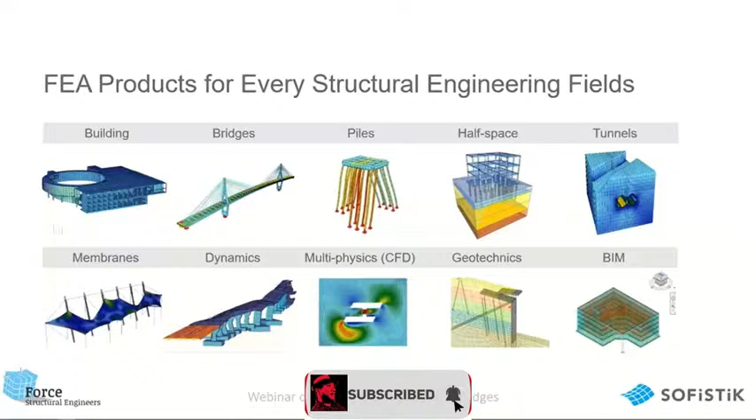You can use SOFiSTiK to analyze and design any type of bridge, from simple bridges such as slab bridges or beam slab bridges to advanced bridges such as cable stayed and suspension bridges. Today's focus is theory of cable stayed bridges. So I would now like to hand it over to Deepak to take it from here.

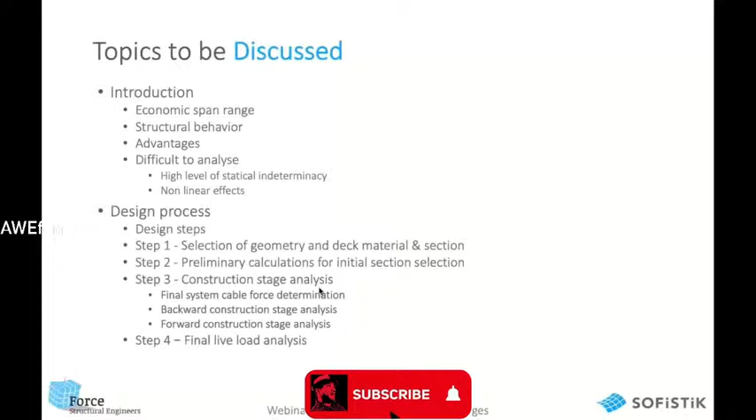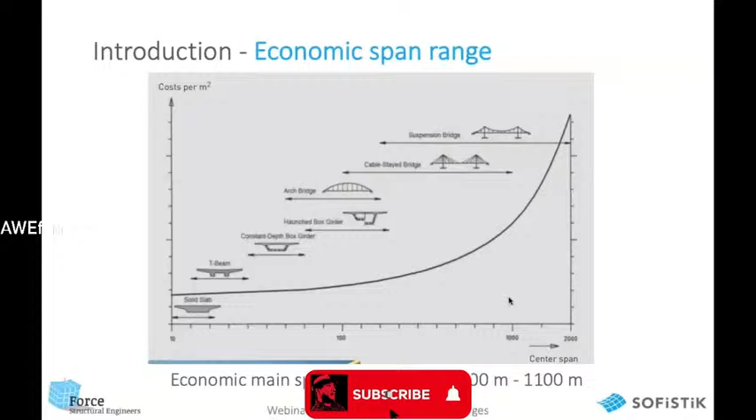Let's take a look at the structural behavior of cable stayed bridges. In cable stayed bridges, the deck is supported by cables. As the deck transfers the dead load and the live load acting on it to the cables, the cables transfer the load to the pylon in tension. Then the pylon transfers the load to the ground in compression.

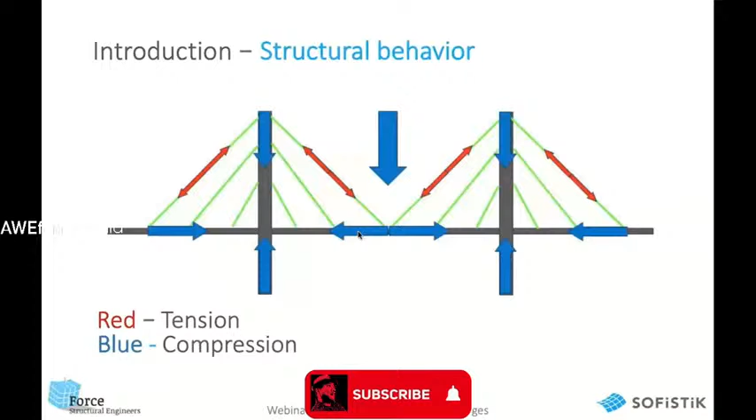Also, self-anchored suspension bridges are required when the horizontal cable component cannot be economically anchored due to bad soil conditions in the ground. So generally, in suspension bridges, the cables are anchored into the ground. The self-anchored suspension bridges will also need temporary supports of their beams until the main cables are installed and the beam is closed.

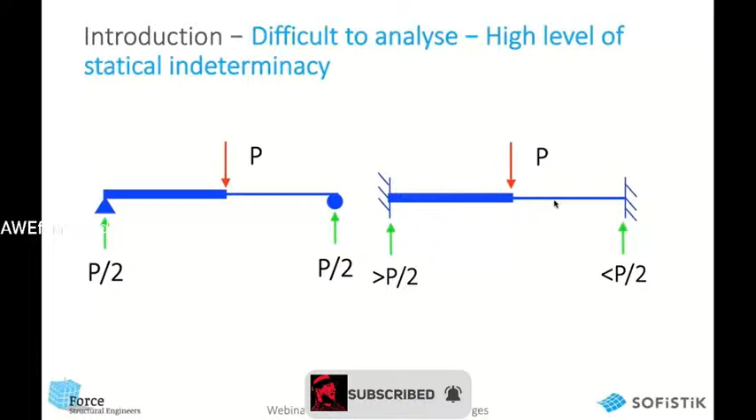Now, as we increase the cable stiffness and decrease the deck stiffness and make them of the same order, we have an extradosed bridge. And as we further increase the cable stiffness and decrease the deck stiffness, we will have cable stayed bridges.

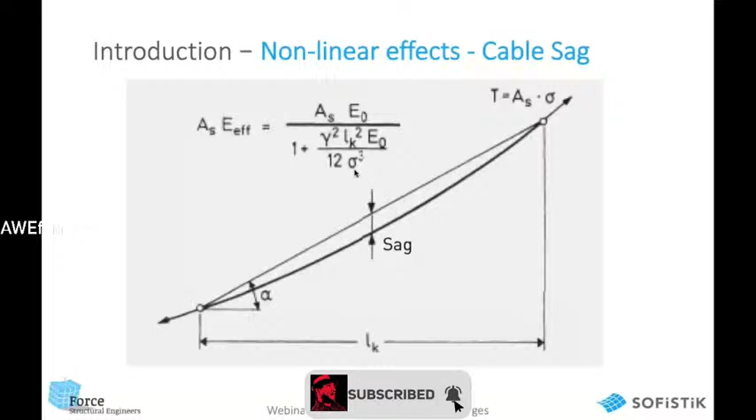Let's talk about P-delta and large deformation effects. Since the deck and the pylon both are in high compression for permanent loads, as we had seen over here, second order moments due to P-delta effects are generated in them.

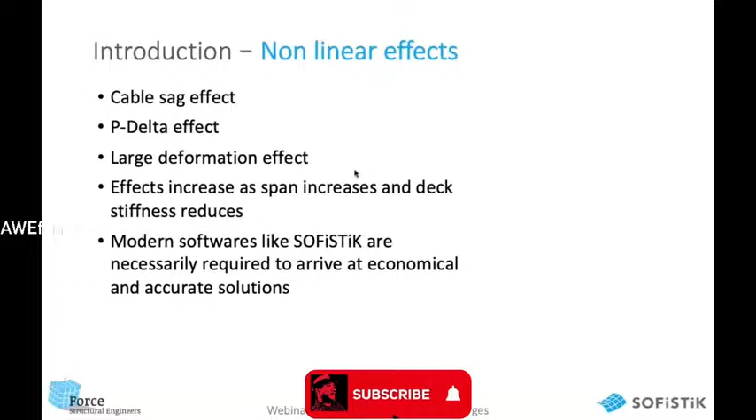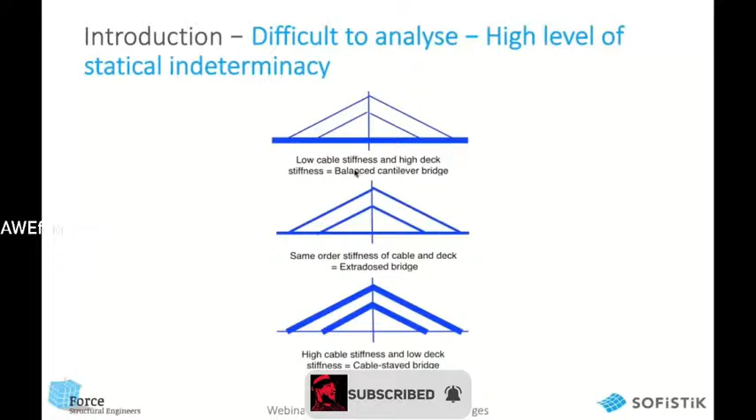These second order moments are due to the deflection caused by live load. The second order moments increase with the slenderness of the beam and can be significant for a slender beam and pylon, and hence should be considered in the analysis. For the same reason, concrete decks are generally less susceptible to P-delta effects compared to steel decks.

Large deformation effects correspond to the geometric nonlinearity caused due to shift in the line of action of axial forces, due to large deflection of elements compared to the initial assumed line of action of force. This effect can also come in the deck of long span cable stayed bridges if the deck deflections are high.

But these effects are always applicable to the cables due to their sag. The sag in the cable changes the line of action of the force in the cable. So we can see over here, if we have a cable from here to here, and if we do a linear analysis, the cable element will be modeled as straight from this point to this point. So in that model, the line of action of the cable force will be the line shown in green.

However, in reality, the cable will sag due to its own weight, and the actual line of action of cable force will be the one shown in blue. This geometric nonlinearity can affect the design forces in elements significantly and should be considered in the analysis.

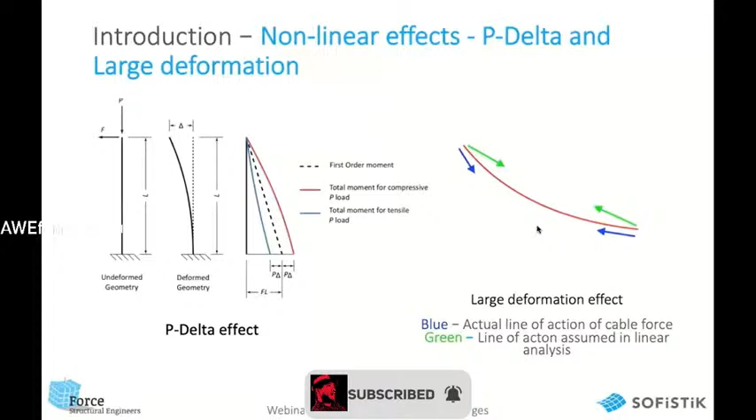Now, since we know all the effects that make the analysis of cable stayed bridges difficult, let's move on to the design process. Since a lot of iterations are required to converge onto the required solution, the correct starting point for the start of iteration is very important. It can greatly reduce the number of iterations required.

Also very important is the process followed to converge onto the solution. Generally, if we follow this design process, we can relatively easily converge onto the bridge and element configuration that will serve the purpose of the design. So the first step is to use thumb rules to select the geometrical parameters such as backspan to mainspan ratio and pylon height above deck.

Then select the cable spacing and deck cross section based on the construction and functional requirements. And then select the deck material based on the span length.

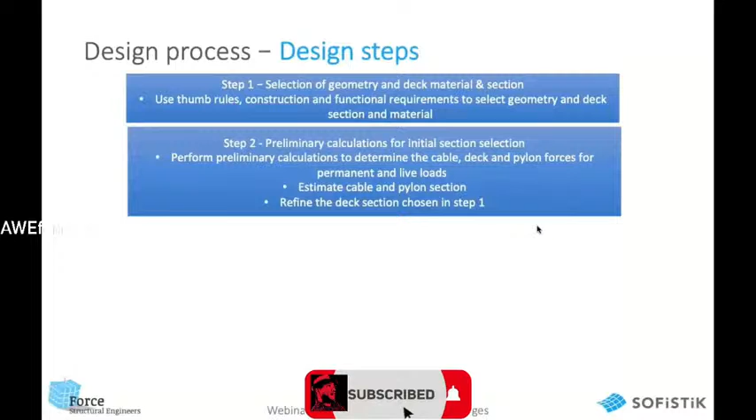The next step is to do hand calculations or some preliminary calculations to determine the cable, deck, and pylon forces for permanent and live loads. Based on these initial forces, we can estimate the cable and pylon section and can refine the deck section chosen in step 1.

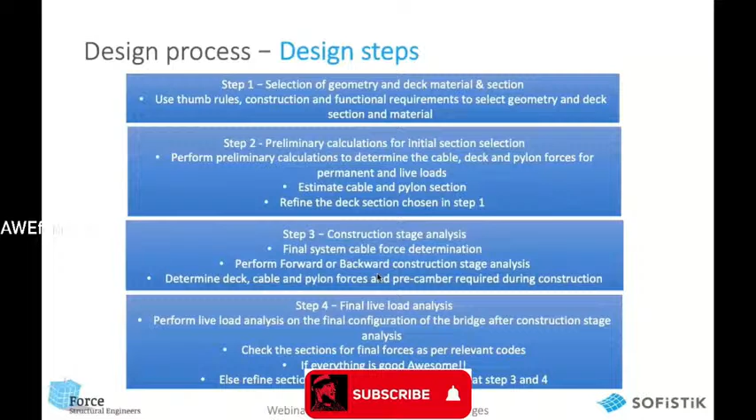Step 1: Selection of geometry and deck material and section. The geometry of cable stayed bridges is determined by the ratio of side span to main span and tower height above deck level to main span. A good ratio is important for an economic design of cable stayed bridges.

The ratio between side span and main span strongly influences the stress change in the backstay cables, the one we see over here. Live load in the main span increases the stress in the backstay, while live load in the side span will decrease the stress in the backstay. Hence, the fatigue stress variation in the backstay will increase in the ratio of backspan to main span.

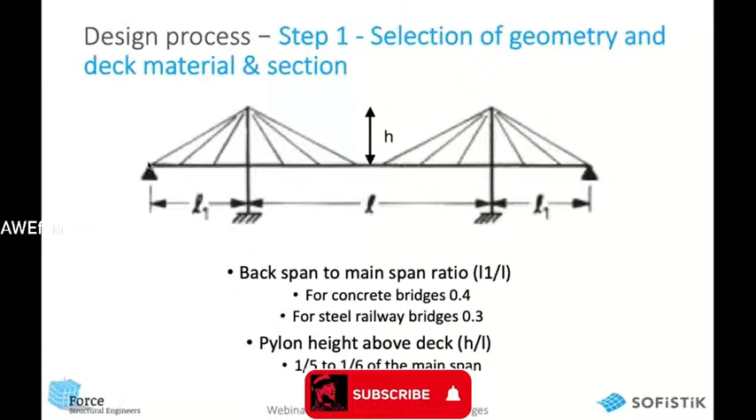Coming on to the next slide: selection of the cable spacing. The cable spacing should be kept as minimum as possible. Small cable spacing results in one cable for each stay, and the anchorages at the tower and at the beam become more simple.

Small cable spacing also reduces the required capacity of the gantry used for construction using the free cantilever method. It also results in small bending moments in the deck due to dead load, which reduces the depth requirement and can create an overall economy for the bridge.

The small cable spacing also results in the reduction of deck and pylon moments and cable force variation during construction. For example, if we have a cable stayed bridge with only two cables, the deck will behave as if supported on 3 points for permanent loads, resulting in this bending moment profile. However, if we add two more cables, the deck will behave as if supported on 5 points for permanent loads, and the bending moment in the deck will reduce.

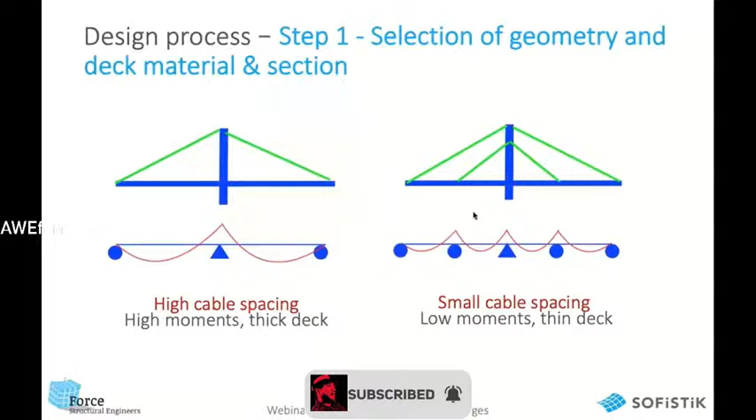Next, we move on to the preliminary calculations for initial section selection. Once we have selected the bridge geometry, the initial deck section and material in the previous step, we need to perform preliminary calculations to calculate the initial forces in the cables, pylon and deck to finalize their section for the first iteration. These calculations can be easily done by hand.

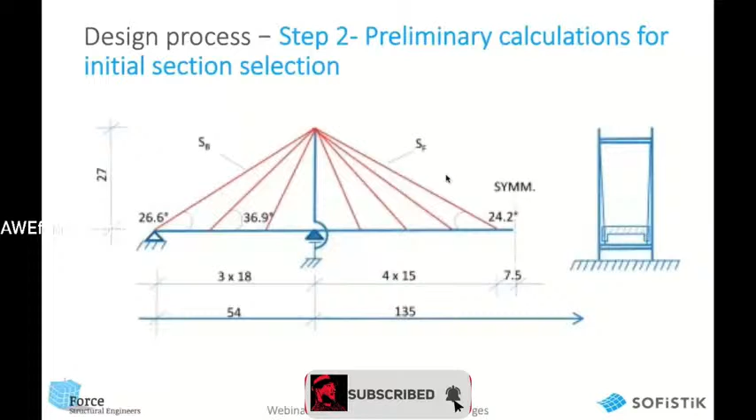The permanent load is assumed to be 128 kilonewton per meter, as we can see over here, and the live load is assumed to be 11.5 kilonewton per meter, as we see over here, with a concentrated load of 375 kilonewton.

Let's first size the backstay cables. For permanent loads, it can be seen that only part D will go into the backstay. Part A will go directly into the anchor pier, and parts B and C will balance each other. The vertical reaction in the anchor pier can be calculated by equating the moment about the pylon hinge to 0.

So if we write the equation, we get the value of R equal to 3000 kilonewton. Now the backstay force can be calculated by dividing R by sine of the cable angle. So if we divide 3000 by sine 26.6, we get the backstay force as 6700 kilonewton.

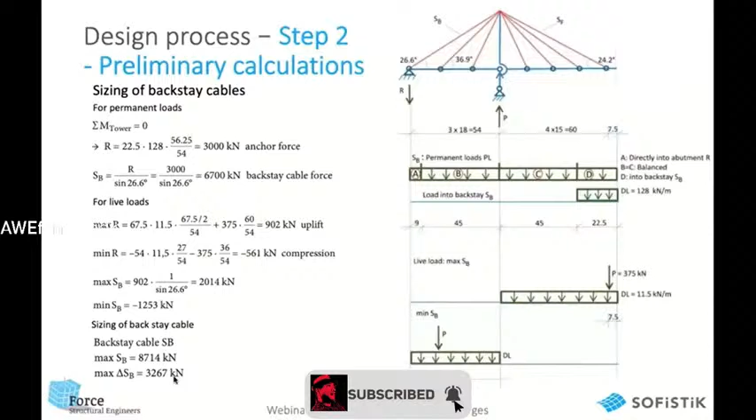So now we move on to the sizing of front stay cables. Sizing of front stay cables can be done in a similar way to backstay cables.

The load in the cable due to permanent load can be calculated by dividing the permanent load supported by it by the sine of its angle. Similarly, the load due to live load can be calculated. The concentrated live load is placed on the cable anchor point to maximize the cable forces. The maximum force in the cable will be the addition of the load due to the permanent load and live load.

And the load due to live load only will give the fatigue range. So over here, if you calculate the tension due to dead load comes out to be 4684 kilonewton, and the tension due to live load comes out to be 1336 kilonewton. So the maximum cable design force will be 6020, which is nothing but the addition of these two values, and the fatigue range is simply the tension in the cable because of the live load. Now again, we can use these values to size the cables as per relevant codes.

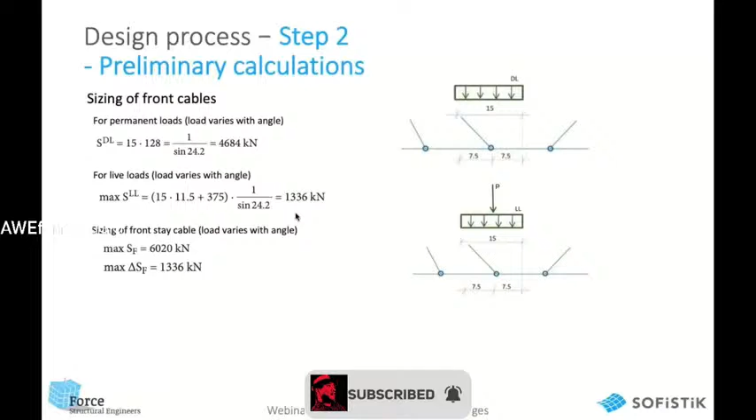Next, we move on to the normal forces in the beam and pylon. The deck compression for closely spaced cables can be approximated as a parabola and can be evaluated with this equation. The maximum compression will occur for permanent load and live load acting together. So, if we use this equation with dead load and live load acting together, the deck compression comes out to be 11,770 kilonewton.

For the concentrated live load, the maximum deck compression will occur when it is supported by the front stay cable. It can be calculated by dividing the concentrated live load by the tangent of the cable angle. Over here, it comes out to be 834 kilonewton. Hence, the maximum compression in deck will be the addition of this value and this value, which comes out to be 12,604 kilonewton. We can use this compression force for checking the deck section for buckling as per relevant codes.

The normal force in the pylon can be estimated by equating the moment about the anchor pier over here to 0. The maximum normal force will occur in the pylon when permanent load and full live load will be acting together. Hence, if we equate the moment about the anchor pier to 0, we get the compression force in the tower as 19,860 kilonewton. Now this compression force is used for sizing the pylon for buckling as per relevant codes.

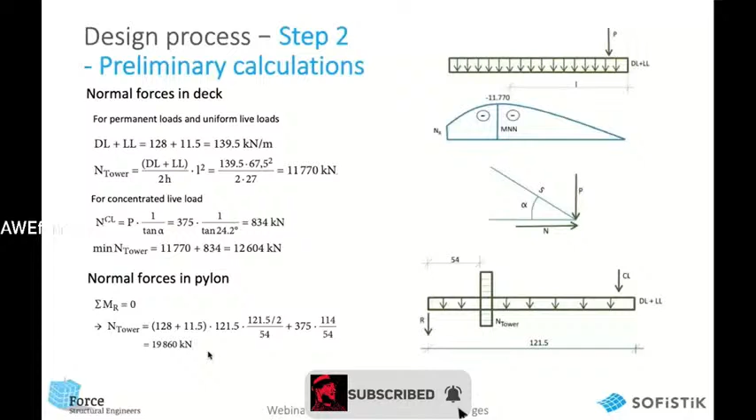So next, we move on to the bending moment in the pylon. The maximum moment in pylon will occur when maximum live load is placed in the front span, what we see over here. This will lead to the maximum force in the backstay cable, and hence its maximum elongation will occur for the backstay, which will cause the maximum pylon tip deflection.

The horizontal displacement of the pylon tip can be calculated using this formula. Here, S1 is the backstay force, S2 is the factor that converts the cable elongation into the pylon tip horizontal displacement. Li is the length of the backstay and A is the area of the backstay. Here, 2014 is the backstay force we previously calculated for live load placed in the front span.

Once we have the tower tip displacement delta, we can calculate the fixed end moment at the pylon base with this formula. We can also calculate the tower normal force for live load in front span by equating the moment about the anchor pier to 0 like we did before. This bending moment and compression is used for sizing of the pylon as per the relevant codes.

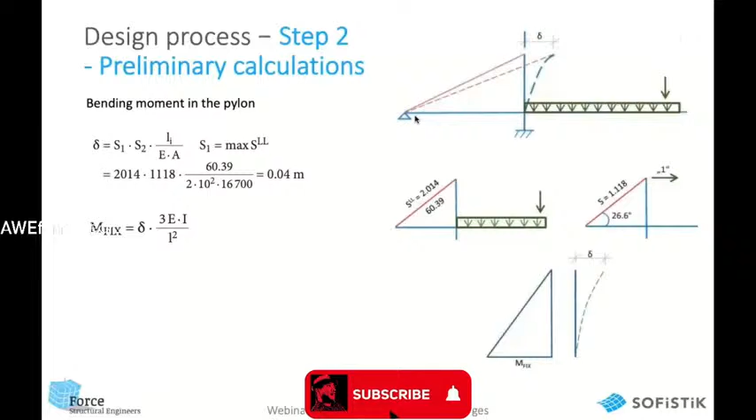Next, we move on to the bending moment in the deck. The bending moment in the deck for permanent load can be evaluated by assuming the deck to be rigidly supported on the cable anchor points. For permanent loads, we adjust the pretension in the cables such that the deck behaves as rigidly supported on the cable anchor points. The assumed condition of deck on rigid supports for permanent loads is specifically applicable to concrete decks because only these moments are not subject to creep.

So, if we calculate the sagging bending moment in the deck, it comes out to be 1200 kilonewton meter. The sagging moment in the deck will be increased by the live load, and the live load moments need to be evaluated. The live load moments can be evaluated by assuming an equivalent system of beam on elastic foundation, or we can make a linear analysis model of the deck with spring supports at cable anchor points.

So basically, we can replace these fixed supports with spring supports. The stiffness of the spring supports is estimated using Ernst's equation based on the assumed cable area and cable force as calculated in the previous step. The dead load of the deck is turned off in this model because we have already calculated the dead load moment. Now we can run live load on this model and estimate the live load moments.

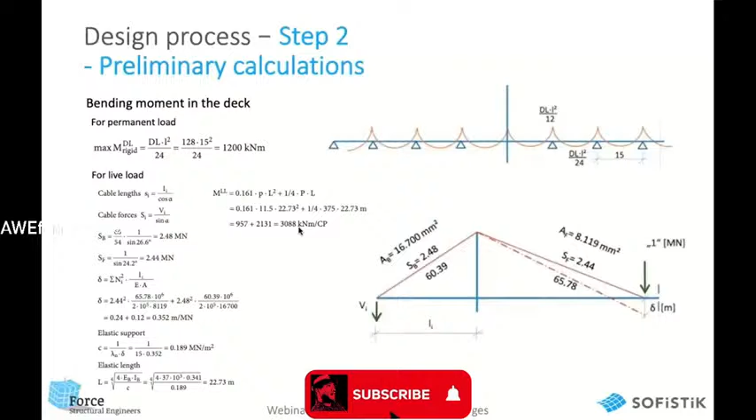So, once we have finalized the geometry and the initial sections of cable, pylon, and deck, we can go for construction stage analysis to determine the initial cable pretension to get the desired bending moment in the deck and pylon for permanent loads. Let us call the bridge configuration with desired bending moments and deck profile for permanent loads as final system for simplicity.

The initial cable pretension here refers to the pretension we need to give in the cable during installation. Please note that the cable force will be different compared to these in the final system. We can also get the pre-camber at which the deck segment shall be installed to get the required deck profile for permanent loads. We can also get the variation in the cable force and deck and pylon movements during construction.

So the first step that we need to do is to determine the cable forces in the final system that will give us the desired bending moment in the deck for permanent loads. We can also determine the cable forces for desired deck profile, but the deck profile is not of real importance because it can be easily adjusted using pre-camber of deck during construction.

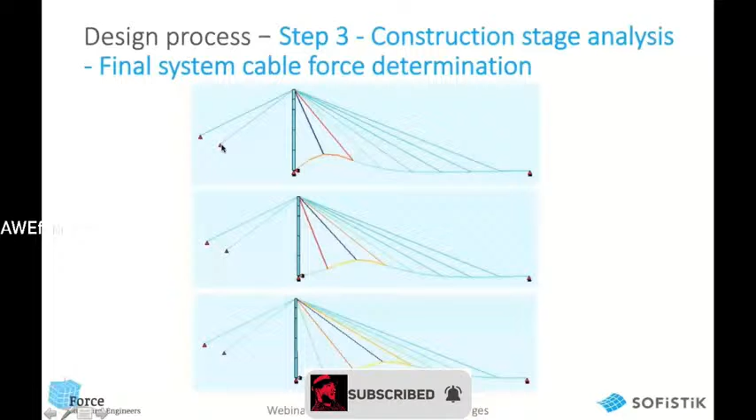So now that we have 8 scalable load cases, we can choose 8 targets. We can choose bending moments, or we can also choose deflections. If we wish to choose bending moments, then we can choose the bending moments we had calculated previously for permanent loads, assuming the deck to be supported on rigid supports while estimating the initial deck section.

Or if we choose deflections at cable anchor points to be 0, we will automatically get the desired bending moments. So here we will choose deflection at cable anchor points to be 0 and the deflection at the pylon tip to be 0. So this is what we want.

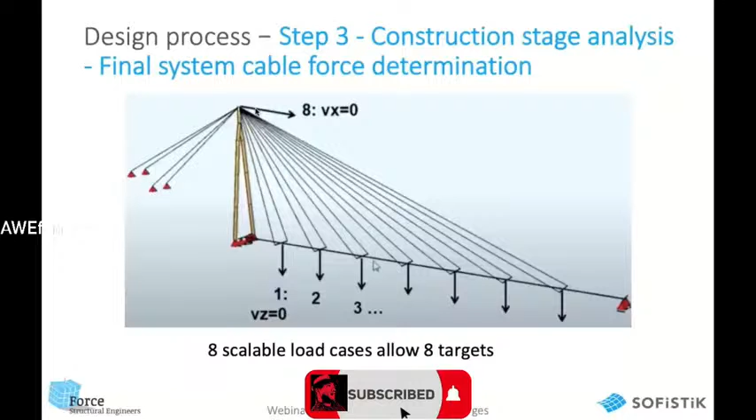Now we can build an equation system for these 8 scalable load cases and can solve it to give us the pre-stress load factors. In SOFiSTiK, we can do it with the CSM optimization tool. So here we can see the system of equations. On the left hand side, we will have the initial pretension factors that we want to calculate, and on the right hand side over here, we have the required deformation or force targets that we provide.

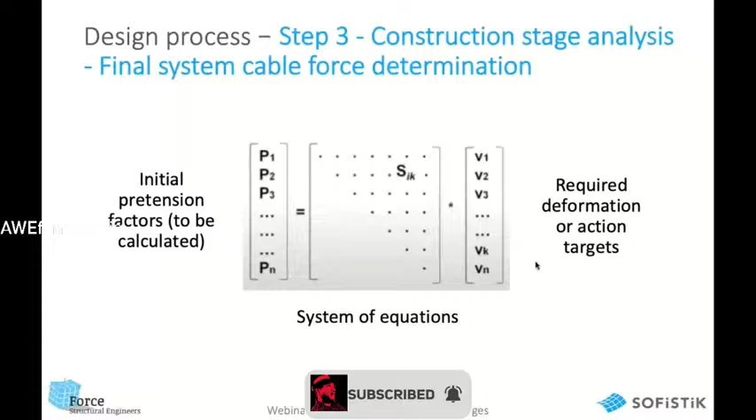If we run the analysis with the initial assumed pretension multiplied with these load factors again, we can see that we get the required deck and pylon deflection, that is zero, and also the required bending moment in the deck. And we can also get the final cable forces.